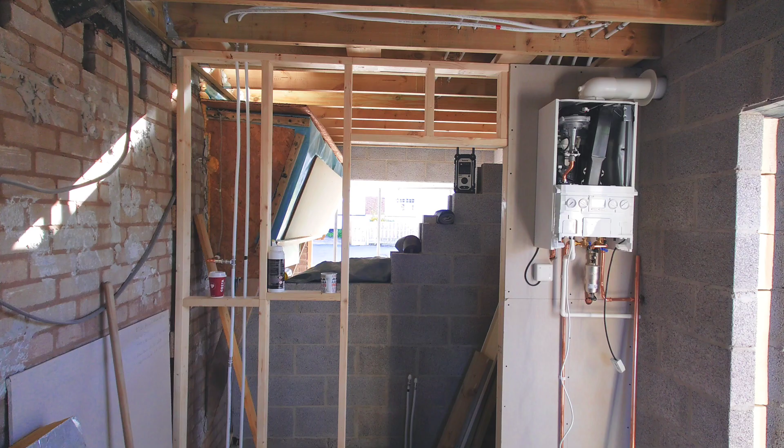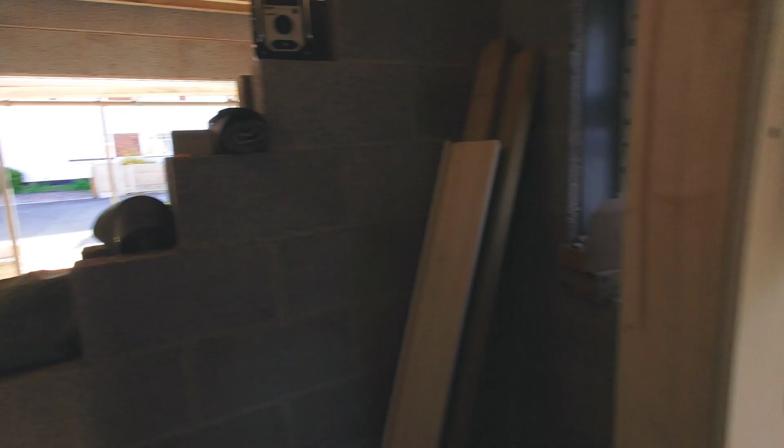What we're doing today, or for the past few days, is we're on a bit of an emergency job. Extension getting built on a house, and the boiler broke down, and we needed to put the new boiler in, because what was happening, that wall's coming down, new boiler going in, part of the building works, but obviously that's now fluing into an extension, so it's had to be disconnected, and we've had to emergency fit an Ideal Logic, not my boiler of choice, but all I could get at short notice at the minute.

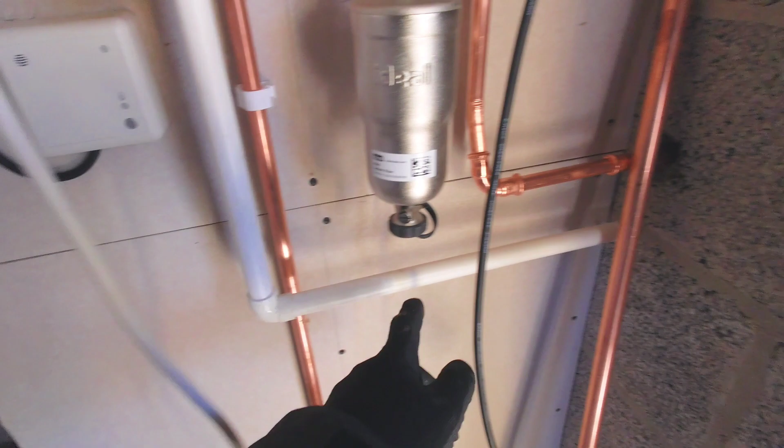A lot of this is temporary because we just had to make it work for now. Such as the condense, don't really know what's happening with the drain, so it's just dripping onto the floor outside. And again with the condense, not sure on the wall finish, so that's going to have to be adjusted to wherever, whenever.

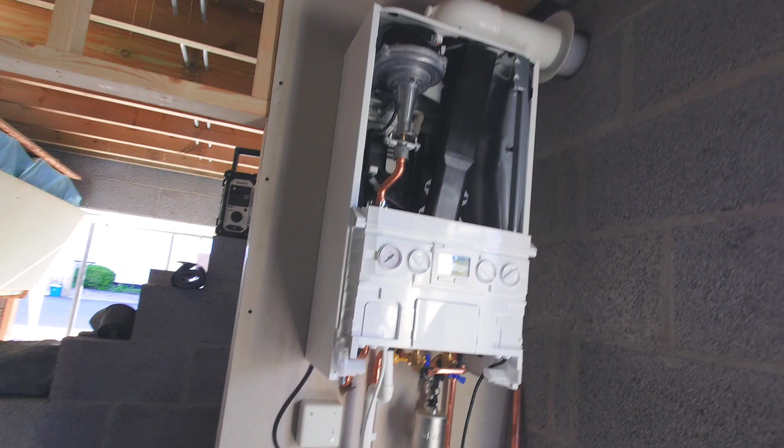Piped this one in MLCP, our pipe system of choice at the minute. Half the price of copper, twice as quick to fit. All this is going to get lagged, obviously. Well, the flow is going to get lagged, but we're going to leave the return unlagged, so we shed as much temperature as we can as the return water gets to the boiler, just to boost that condensing efficiency on the boiler.

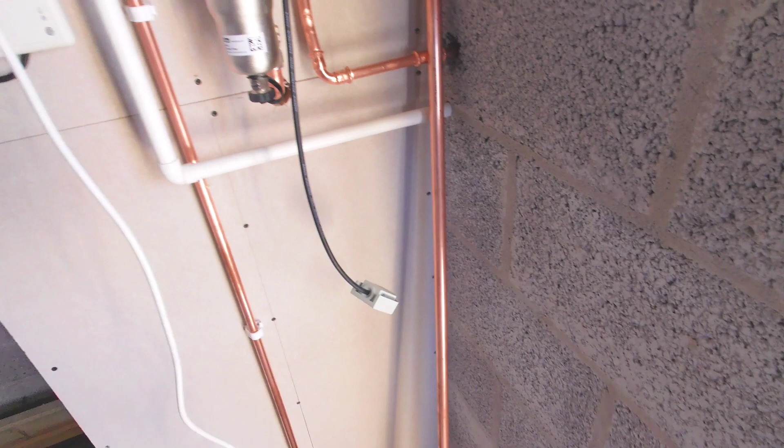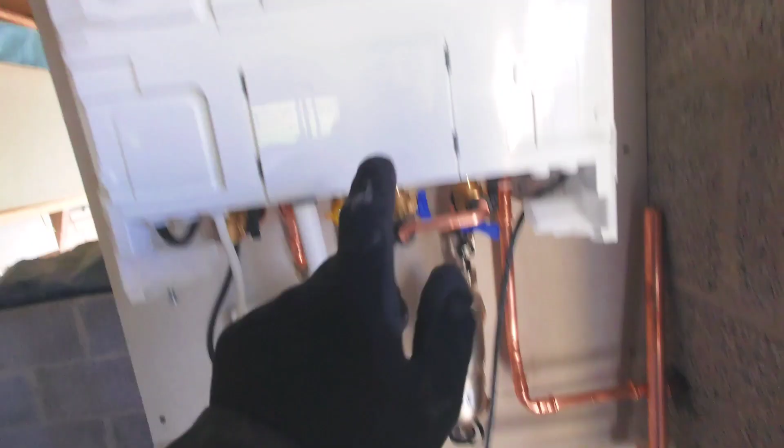We're running it on a weather comp system. If you're fitting an Ideal Logic, there's really no reason not to fit a weather compensator. Obviously this again is just temporary. It's going to run externally once the sparky puts a cable in for us. It's just running on and off time on a Hive, and the boiler modulation is controlled by the weather comp sensor. You then set the weather comp curve on here, and it helps that boiler run a little bit more efficiently, or a lot more efficiently, because it adjusts the output temperature in line with the external temperature.

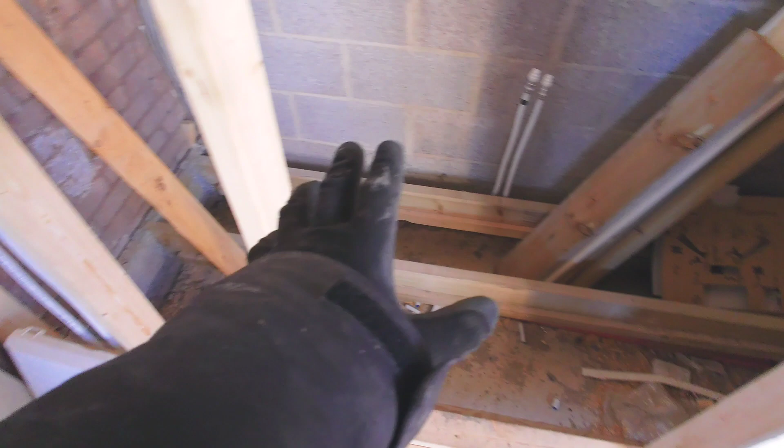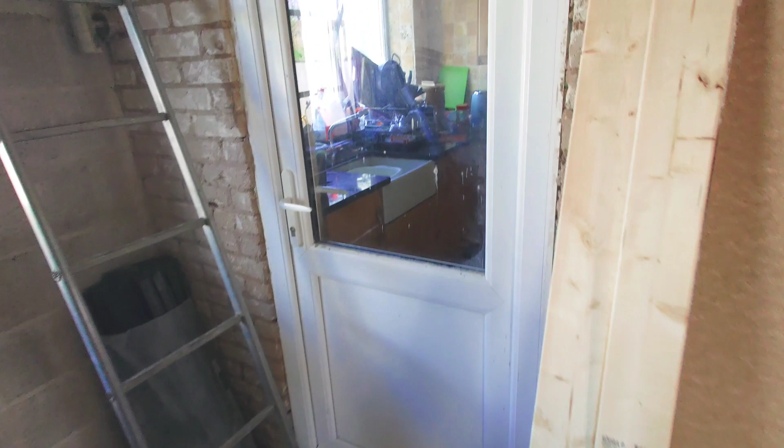So yeah, basic run of the ground. We've got a cloakroom here, sink, toilet, shower. Utility room here, wall there, there's a rad going there. And this is part of the kitchen, it's all getting knocked through. Two walls coming down, big kitchen diner, and we've got an upstairs.

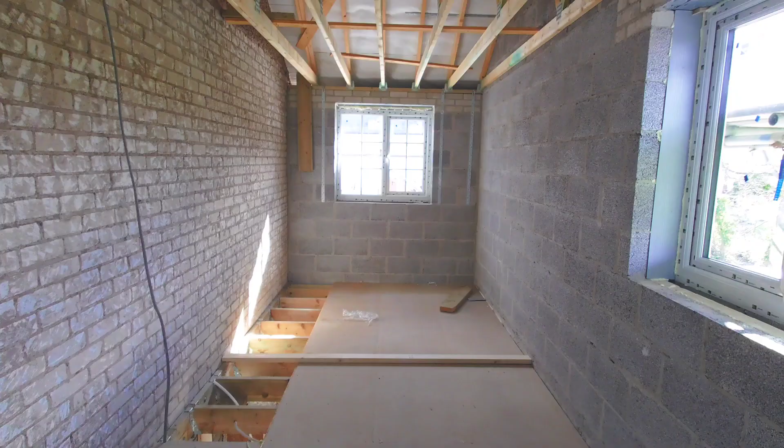And also, as part of the work, we're converting this system to a DT35 system. And what that means, don't confuse it with the DT flow and return, it's the room delta. If you look at your Stelrad catalogue, most of the radiators will be designed to operate at DT50, which is a 50-degree difference between the surface temperature of the rad and the room, or the mean water temperature and the room. So we're running this at a 65-45 design temperature, which gives a 35-degree room delta, because our mean water temperature in the radiator will be 55, with the room temperature 20, so that's 35.

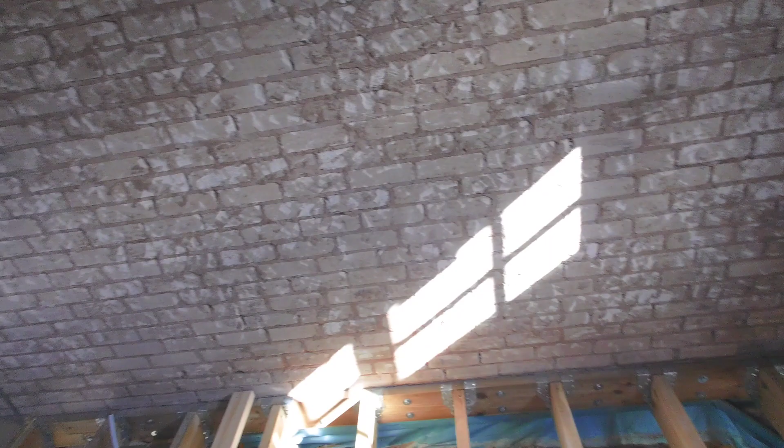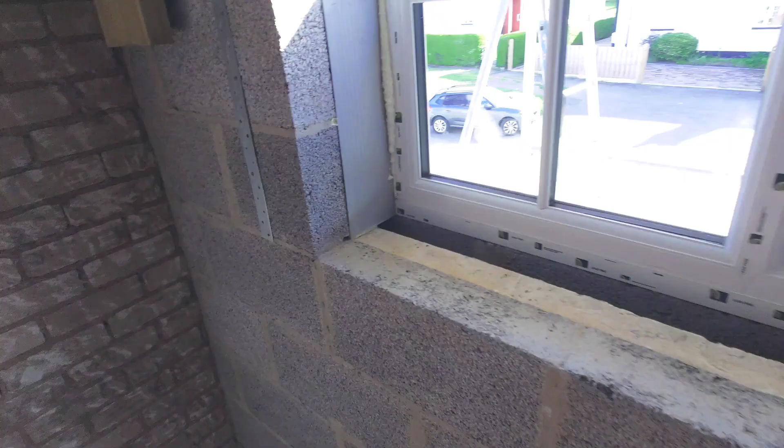So this is the upstairs of the extension. We've got a bedroom here. That's getting a knock through there to extend the size of the bedroom, so it's a double-sized bedroom. This is going to be an office, and here is a bathroom, 1700 tray there, toilet, basin, easy as that. When we size the radiators, we've got to up the size of them by at least half, just so we've got the right emitter size.

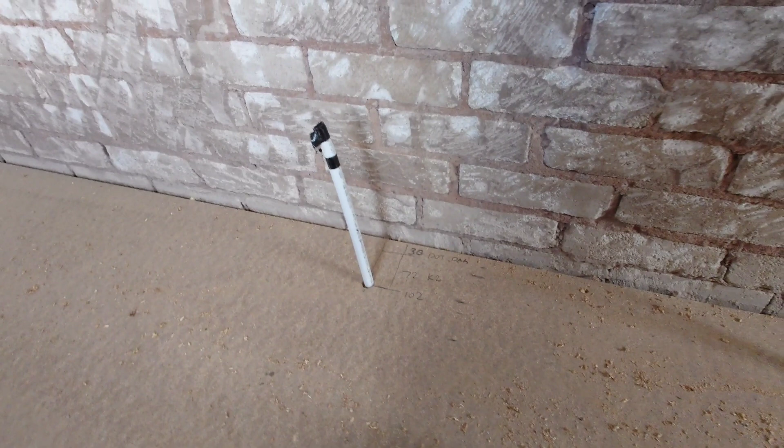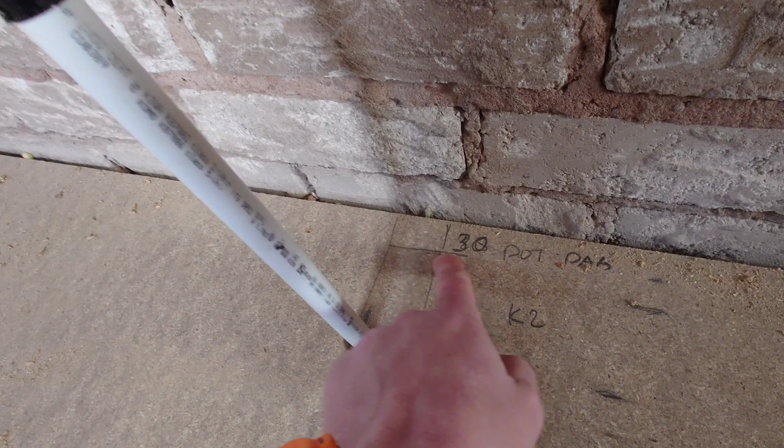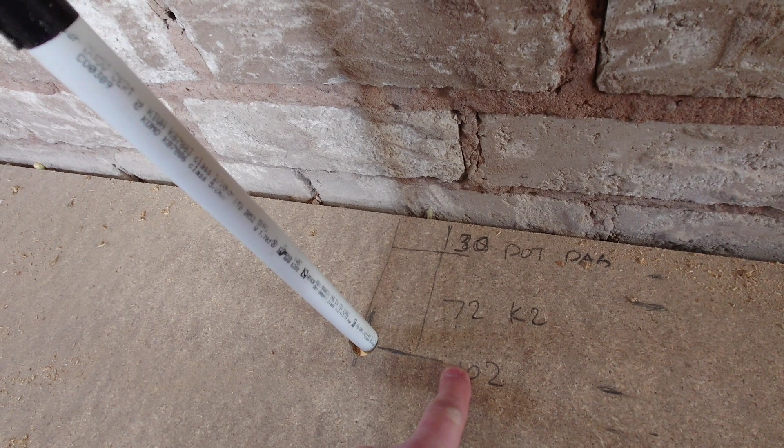So one thing that I come across a lot on jobs is when the property's first fixed without any reference point to do the pipes on the wall, the pipes are often too tight to the wall and they don't enter the rad valve straight, and they're crooked, or they're halfway in the skirting board. Doesn't take much effort to figure out what you've got to do. We're having a K2 radiator here, so we have 30mm for the dot and dab, and if you look at the Stelrad data on the radiators, from the surface of the wall to the centre of the radiator valve point is 72mm, which gives us a total distance from the wall of 102.

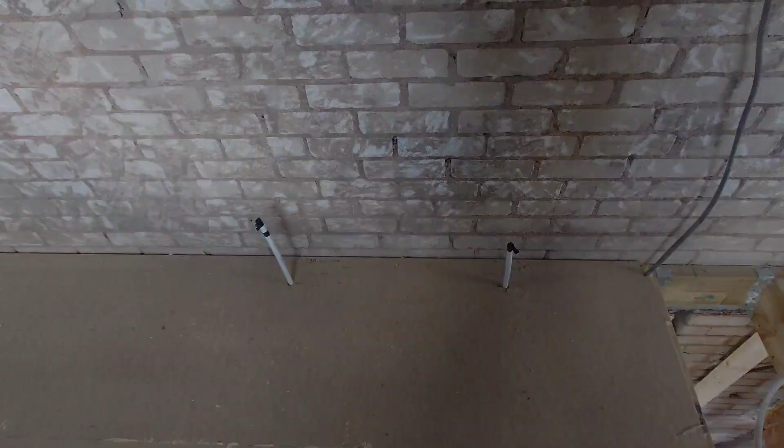It looks too much. You'd think when you first fix that, fucking hell, the pipe's going to be in the middle of the room by the time it goes on, but no, by the time you've got your dot and dab, your skirting and your rad, that's going to be bang on. And obviously plus 95 for the valves, so 695, 102mm off the wall for a K2, and yeah, that should work out perfect.

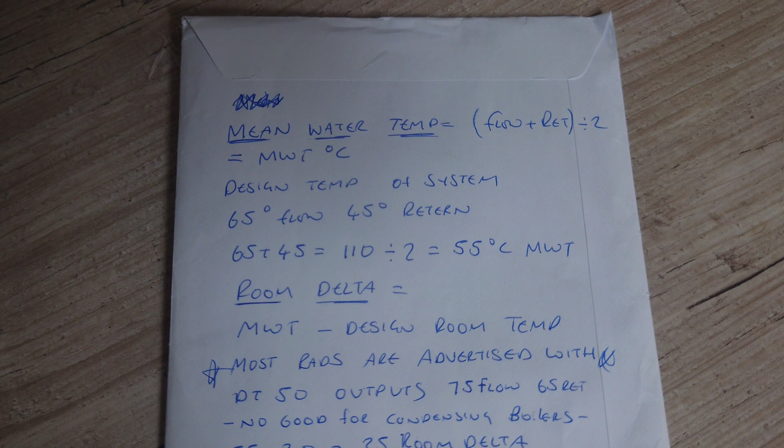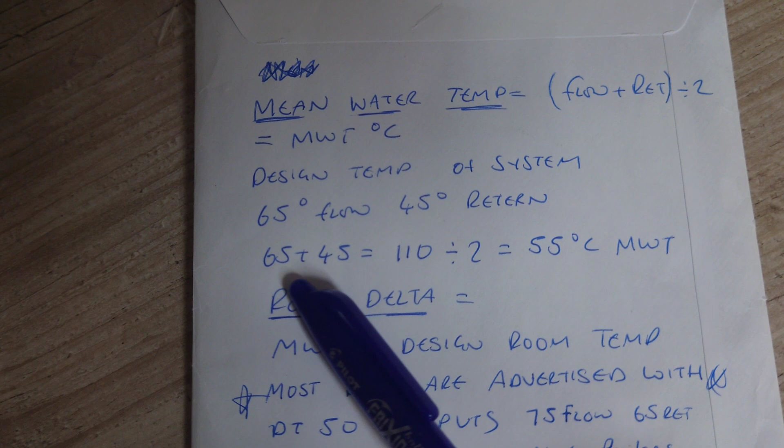So I mentioned briefly in the video there about radiator size, but didn't go into it in any further detail. It's quite simple, but it's quite complicated at the same time how you calculate the sizes of radiators. So the first thing you need to do is a full heat loss on the building. But let's take the front bedroom of that extension you just saw, and let's just say we need a radiator of 500 watts to heat that to 20 degrees on the coldest day of the year. So the first thing we need to do is decide the temperature we're going to run our heating at. And I said previously we're going to run it at 65-45. So that's 65 flow, 45 degree return.

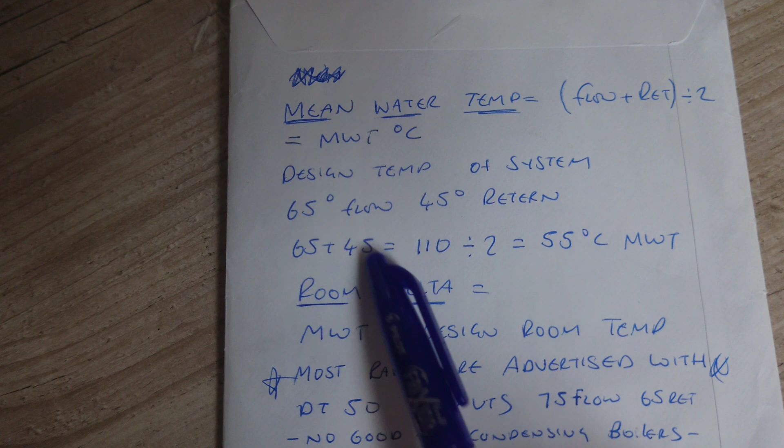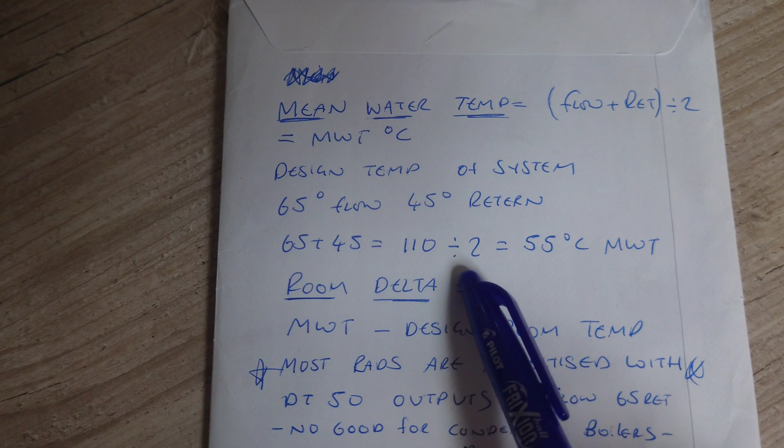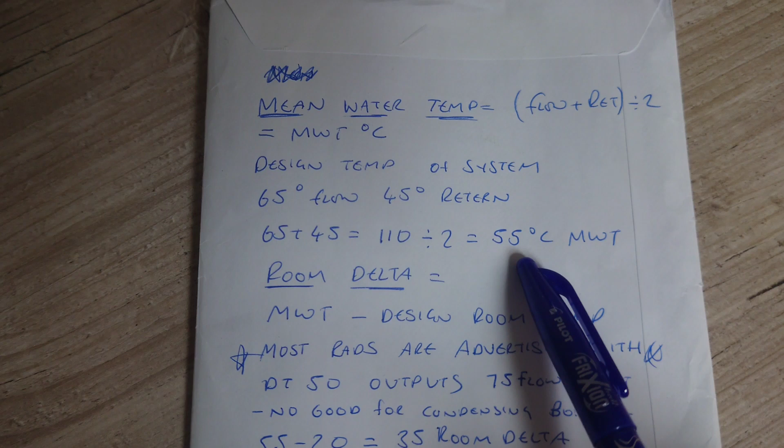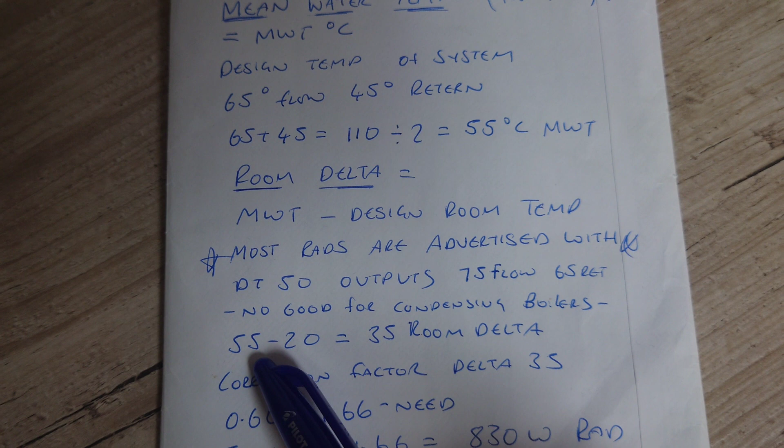And with those numbers, we can work out what's called the mean water temperature, which is the average surface temperature of your radiator. So to do that, we do 65 plus 45, flow plus return, divided by 2 equals 55 degrees. So if you're running a 65 degree flow, the surface of your rad on average is going to be 55 degrees. And then once we know that number, we can move on to our room delta, which is the difference between the design room temperature and your mean water temperature. So mean water temperature, take away 20 degrees, which is the room temperature, gives us a room delta of 35 degrees.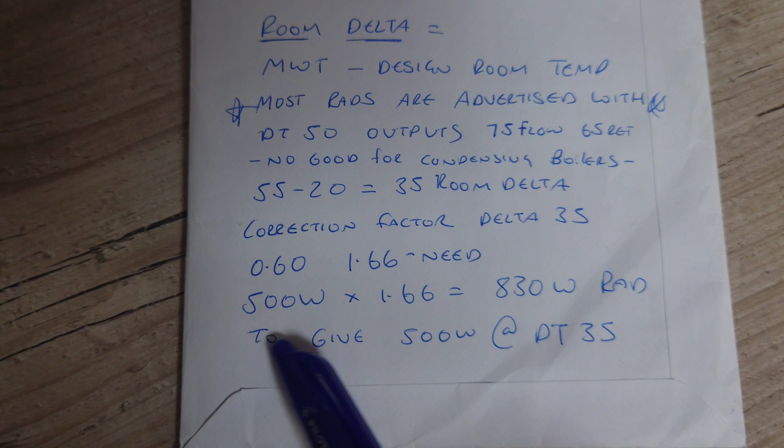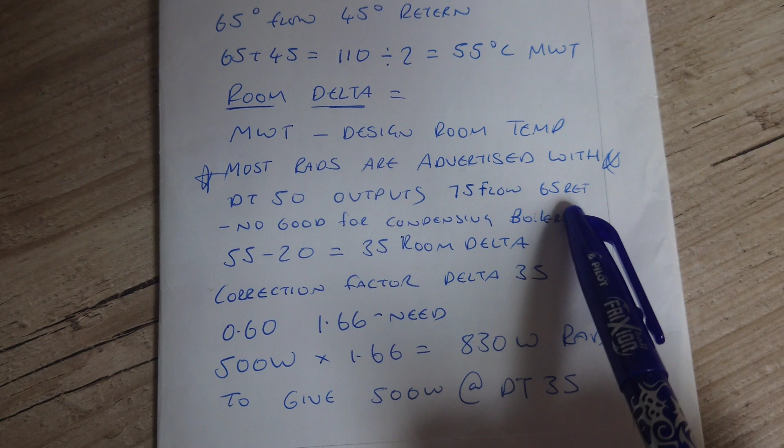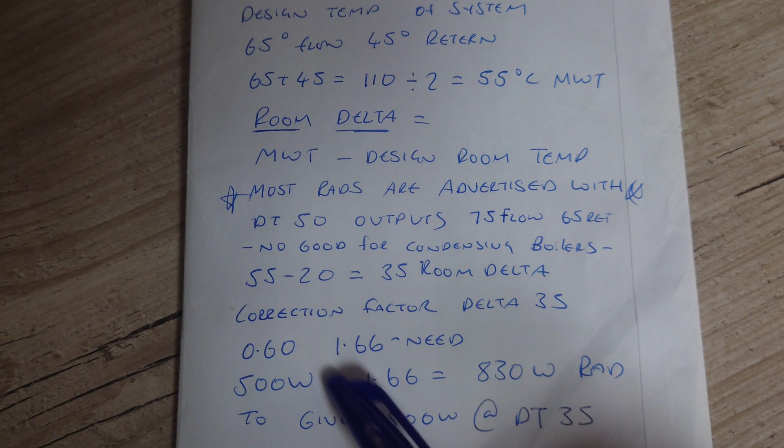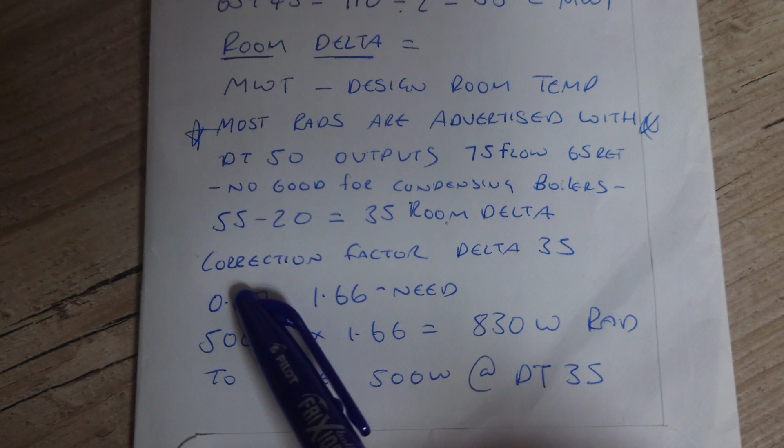Now, when you look at the radiator catalogue, all the outputs will be measured in DT50, which is 75 flow, 65 return. So if we pick a radiator that outputs 500 watts at DT50, when we run it at DT35, putting less energy through it, it's going to kick out literally half that wattage. So you put your 500 watt rad in and it will only be kicking out 250, 300 watts, and the room won't get to temperature. So what you have to do is apply a correction factor for delta 35.

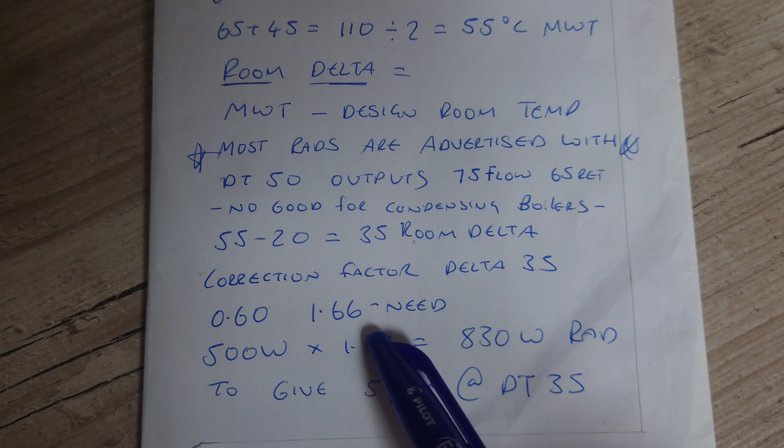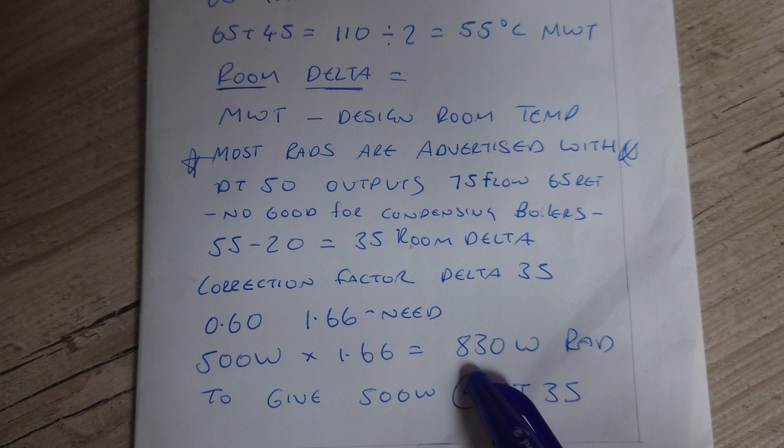CIBSE published tables for these, and you need to multiply your radiator size by 1.66 for DT35. So 500 times 1.66 is 830 watts. So you need to look in your DT50 catalogue for a radiator that outputs 830 watts, and then when you put your DT35 energy through it, it will give you 500 watts. Simple as that.